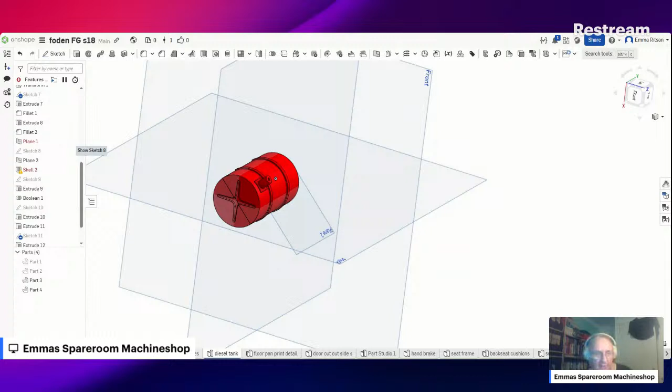Peter, g'day. Paul, g'day. Hello, Mark. Let me know if you can hear me. That's the other thing, don't know if you can. You probably can't yet. You know why?

Microphone. Microphone, is that better? Try that. Am I getting anything there now?

Can you hear me? Yep, we hear everything. Excellent. Me muttering to myself.

Look, this was a bit of a harebrained idea, and as a rule I'm pretty good with questions. That's worse. Plugging this in makes it worse. Let's have a look and see where we're not plugged in properly. Is that better? Let's get this right first. It was fine before. Is that better?

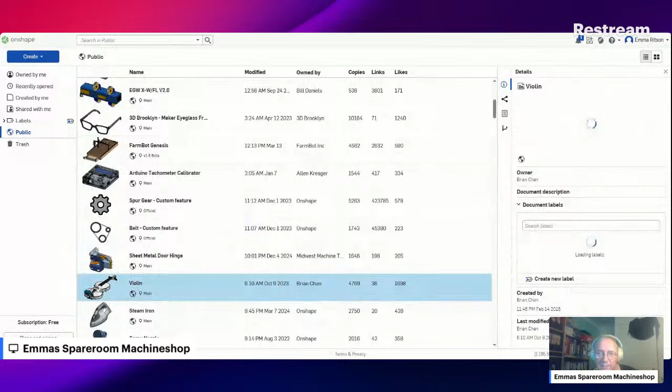That also is probably not the most simple file on the whole server, but anyway, let's give it a minute. I don't know how much lag you're getting. Hopefully it's not too bad. I think I've probably got to slow down a little bit.

Got this bar down the bottom, which means that it's not my actual - even though I'm logged in up here, Hey Russell, even though I'm logged in, I can't actually edit this document.

This looks like a 3D printed violin. I've got all the parts. This looks like a good drawing, actually. He's labelled everything, which, more or less - or we started off labelling everything, which is usually how it works.

Up here we've got a list of features, which are actual parts of the drawing. That's still coming, it's slowly getting there. Now that's a very nice drawing, absolutely. We've got features down here if you want a bit of a look at it. So there's a section view. If we turn on the plane, we can just select a section view.

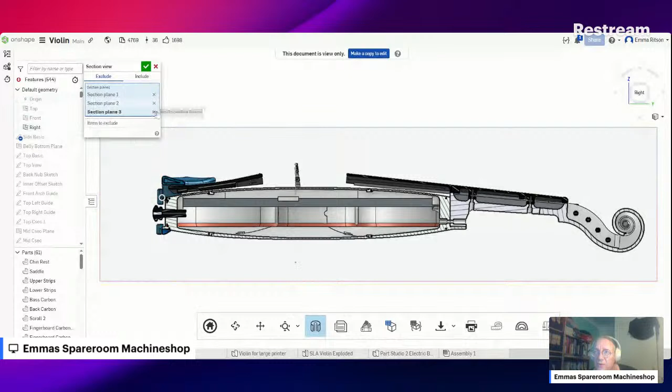So we can either finalize that and have a permanent, well, semi-permanent section, or we can just close it again once we've had a look. And there we are, back to there.

Now down here there's a parts list. If we have a look at that, we can turn these on and off with a little eye as well. So that's how that works. So you turn the chin rest off and on, and the saddle, which I don't know.

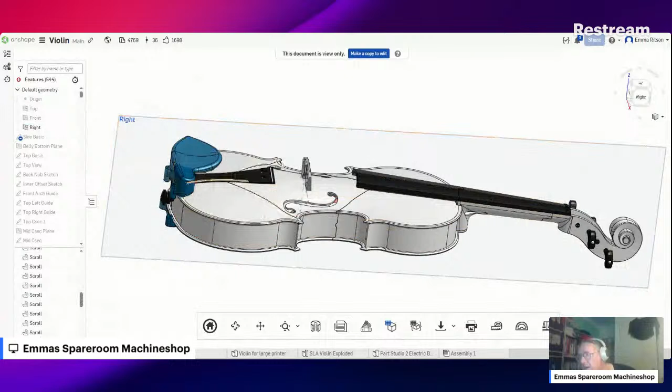But if we come over here and we want to know where something is in the drawing, if we click on it, it will highlight on this drawing exactly which part you've clicked on. So you see that's highlighted it. So we can either turn that off, which turns that off.

We've got all the zoom in and out controls. We've got an appearance panel. We can print this out. We can take a measurement and we can work out what it weighs. We can do some basic analysis, like probably some quite complicated analysis too. We can do curve analysis and interference detection.

So basically, if you've got two bits that look like they're going to bump together somewhere, we can do interference detection on your drawing. And that's something you can do in your drawing as well. Often a section viewer will just pick that up. But I'm not going to make a violin - this is just someone else's drawing, and we've picked this up at random.

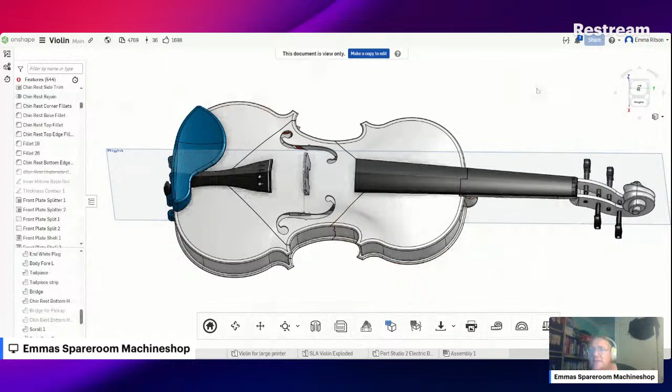If we go back here to Onshape, and we'll start on something. Go back to things that are owned by me. And we've got some options. We want an Onshape document at this point.

And we'll call it something, I don't know. Something that would seem like a really good idea is to make a workshop with some models that we can move around so that we can rearrange our workshop and know if everything fits. That seems like a fairly useful thing that everyone could probably use.

So I thought that's where I'd start, and we call that workshop. That'll automatically open. Now, you'll notice that our planes are already up on the first workspace here.

So you've got a right plane, turn that off and on, same as before. And a front plane, we turn that off and on. And a top plane, and we've got an origin point left. So this is the origin point, which is zero point.

Not a lot of point turning any of them off just yet. But say we want to start with a workshop. We've got Part Studio 1, and this name on this is not particularly helpful. I don't know how to fix that, because down here under Emmas Spareroom Machineshop is a tab that says Part Studio 1. I'm going to rename that to Workroom.

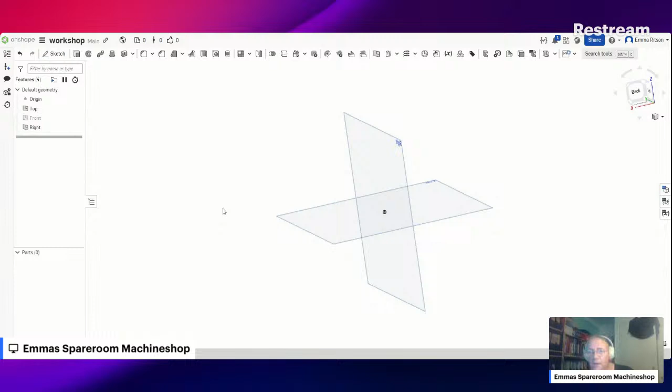And then there's another one called an assembly, which has a different symbol. This one's just got two little columns - that's just a part studio for a single part. This next one, if we hover over it, has two pieces fitted together, and that's an assembly. You can't see that because it's behind my logo, which is a bit of a problem - I'll have to work on that. I'm not sure how to fix it, but we're going to have a look.

So we can pick which side we want to draw on, because this is a bit confusing. If we look at this little square up in the corner, we've got front, top - if we click on top, that'll automatically bring the top plane down nice and flat. We can drag it around with the mouse, or if we use the right button we can just drag it like that. If we click on the corner, that gives us isometric.

So we need a workshop. How big is our workshop? How big is my workshop?

If we sketch it out, if we start at 0, we've got a sketch panel that comes up with some things on it. We're not going to go much into these - they're all fairly useful things in their way, but we don't need to click any of them. Show overdefined is kind of useful, because if something doesn't work, you can see where you've got one too many measurements on it that don't add up. That's helpful.

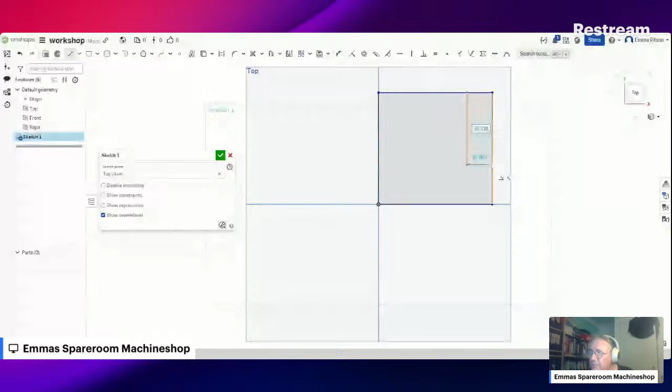Now, if we go to this one and highlight that one and then come back, that changes - and what that's doing is saying it's actually parallel with the other line, which is two different things. So what you've done is change that slightly. If we click on that, it puts a line in, and we click on there, puts a line on. If we press escape - now we haven't put any dimensions on there, but that's roughly what shape my room is.

And there's a little wardrobe in the corner here. What I'm going to do is use the scissors, which is this one here, trim. We can press lowercase m, or just select our icon, and if we select that line there between the 2 points and that line, that automatically removes that.

Now, this square - everyone tell me if I'm going a bit quick - but this square here is grey compared to the background, which is quite a lot lighter. And that means it's been resolved, or the sketch is complete. All the corners match up, and I guess it's filled up with water - there's no leaks anywhere in our sketch. So because that's grey, we know that we can extrude it.

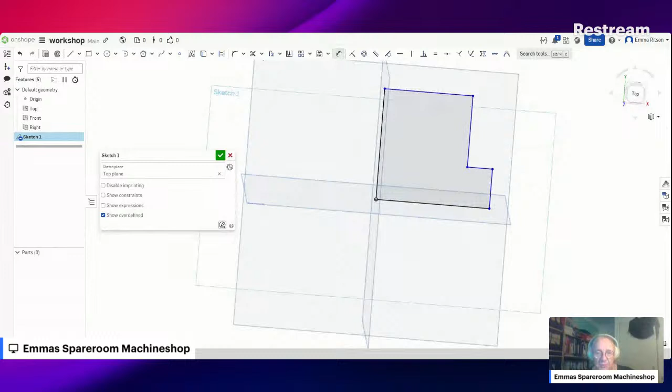And we could go in and put some measurements on that now if you wanted to. If we click this one, which is the measurement, a dimension, you can do exactly the same thing by just pressing D, it selects it. There's shortcuts for everything. If you press L, it selects line. If you select Q, it selects construction line. M selects trim. We'll start with dimension.

Now, that's not much use to us. It says 61 millimeters. Room isn't as square as you think. That's exactly right. But I reckon the room's about 3 meters by 3 meters. So we make a scale model, or we could do it in full size. And there's really nothing stopping us doing it in full size, except that it gets a bit bulky.

So let's do it at 10 to 1. If it's 3 meters, we'll call this 300 millimeters. Now we can change that.

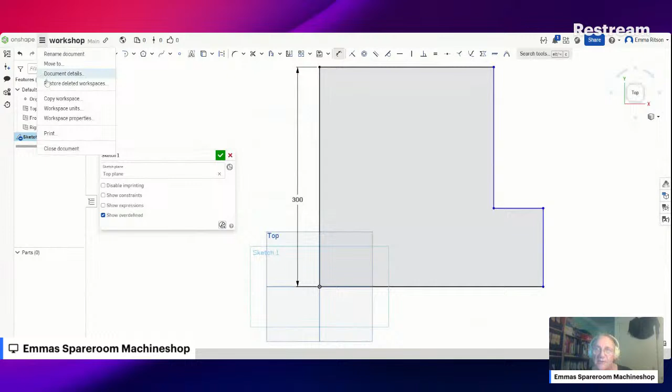If we go up here to this drop down tab up the top here next to where it says workshop, we can change the workspace units. So we can change it to inches, right? And we can change it back. So if you've got a part that really is in inches and you'd like to work on it, you can change it backwards and forwards. You can change it to yards and meters. You can change the amount of decimals and kilograms and all those sort of things. So that's pretty useful. We'll leave it at millimeters.

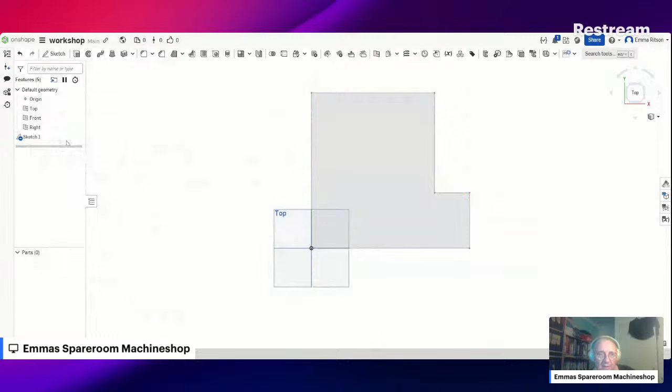Now we've clicked off that sketch when we've done that. It's closed, so we need to go back to the sketch. You notice again that the sketch has got a little eye beside it, so we can turn the sketch on and off if you want to hide it. But if we right click that, there'll be a little turn that says edit, and that gives us our sketch back with our dimensions.

If we do the same thing here, and we've missed out a decimal point there, but we can easily change it. So I reckon that's roughly what size it might be. That's the floor plan.

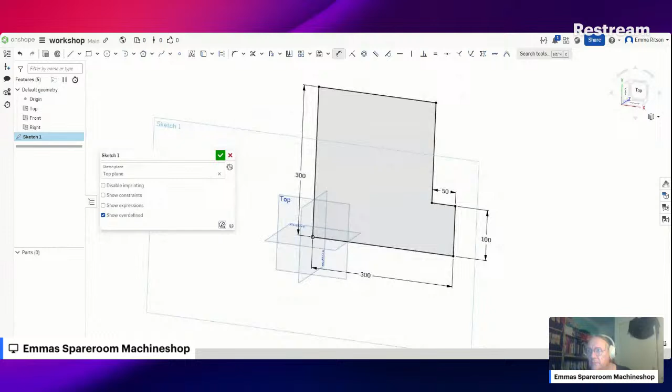For the purpose of this, there's not a lot of point probably extruding it up 8 foot tall or whatever, but we can probably do this just to make it solid. If we click the extrude button, I don't know if anyone saw what I did there. There's this button here. You don't need to close your sketch because it'll automatically select the sketch if you've got your sketch open, and we'll do that.

And we can rename the sketch, right? There's a little pencil there. And that way, when there's 1,000 sketches, you can look back and see exactly what it is, because that changes the name here on the feature menu.

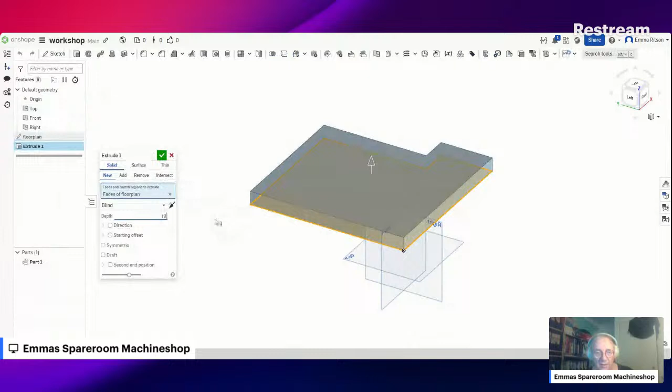Now, to make this into an object instead of just a sketch, if we click the extrude button, that'll extrude it up 25 mil, which is 250. Give it 10 mil, say, for timber and everything.

So there we go. Doorways over here, wardrobes here. We've got all this space. We can change the color. We can change it here where it says part 1. We can change this to the floor, and that way we know exactly what we're looking at. Is everyone following? I don't know if you are or not, but anyway, I'm having fun.

If you right click this, there are all sorts of things you can do, right? You can export it to a printer. You can export it to a laser cutter. You've got resizing, so you can zoom it to fit basically to fit the space. On the right click, you can copy it. You can make a section view. You can hide it, you can isolate it, you can make it transparent, if you want to see something through it to see how it fits.

So what we need is to press the plus button, which is right down here in this corner. There's a plus button. I'm going to have to do something about that logo, I think we're going to delete that next stream. And if we create a new part studio, it pops out almost past the end here. That puts us straight back into part studio number 1 because we already called the other one workroom.

If we rename this one as tool chest.

And let's start here. This is a fairly straightforward thing, the same thing - sketch on top. So it's all basically the same. We'll go corner rectangle, which is R, the shortcut for that.

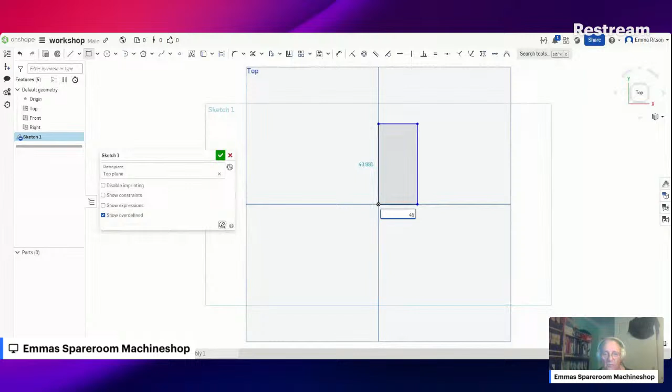I reckon I'll call it 45 mil wide, and I think it's about 600 mil deep, so we'll call it 60 millimeters deep. That doesn't look right - it might be 90.

If we need to change the measurement, if we just press the escape key so none of this is lit up, then we can just double click on the measurement and change it. So that's kind of useful.

I reckon it's 90, that chest. Well, the same deal - we extrude it because I reckon it's 900 high.

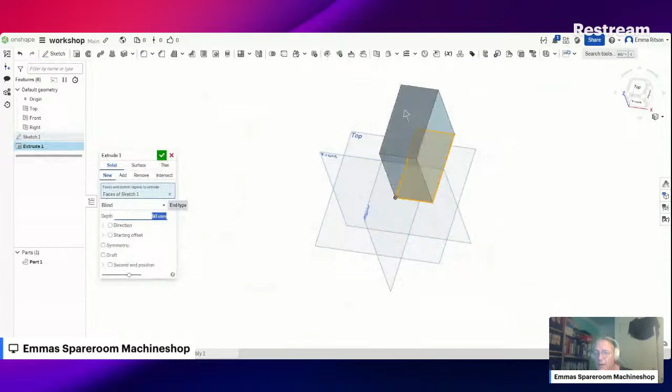Right, there you go. So we've got the two parts. What we need to do is go to this assembly. When we hover over it, see the other ones - when we hover over them, they've just got a part studio icon. This one's got an assembly, 2 parts fitted together. If we go there...

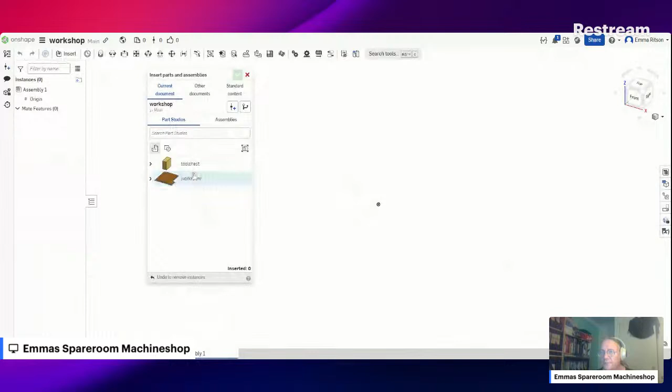And we can insert this. First bit we want to insert is the floor. And this comes up with a list - one says tool chest, one says workroom. If we insert that and click OK, we can stop this moving around because this is right on the origin point, see?

We've scaled it 1 to 10, I'm sorry. You can please yourself whether you do that. If you want to do it in full size and measure it up, it's not a problem, but this is probably a pretty good project to do.

This has got a fancy little feature here. We can right click this where it says here, and we can use this to here, which is fix. And that gives us a little part is fixed, right? So it won't move around - we can sit all the other stuff on top of it and this won't move.

Once we've got that, we can just pull the bits in, really. Put this tool chest in. Now that's kind of exactly where it is in the room. Right? But if we wanted to move it around, we just got to click on it.

And we can grab these and drag it around in a circle. Or we can just press escape. That hasn't put it back where we wanted it - it's all over the place.

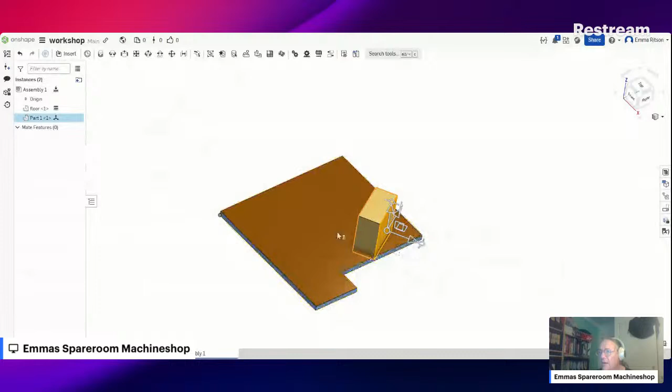Another thing that's interesting is that this pokes through the floor here because this is our origin point. Now we can change this quite easily because we've extruded this up and we've extruded this up from the plane. It's easy to go back to our workroom.

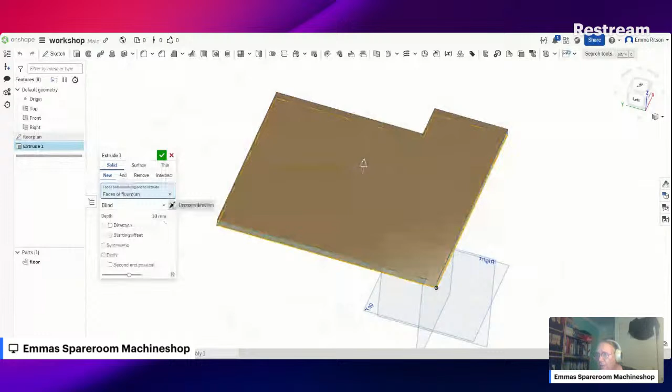Part studio here, and where we've got our extrude up here, if we right click that and click edit, what we can do with this is click this arrow. Right? And that's reversed it, so it's going back down through there.

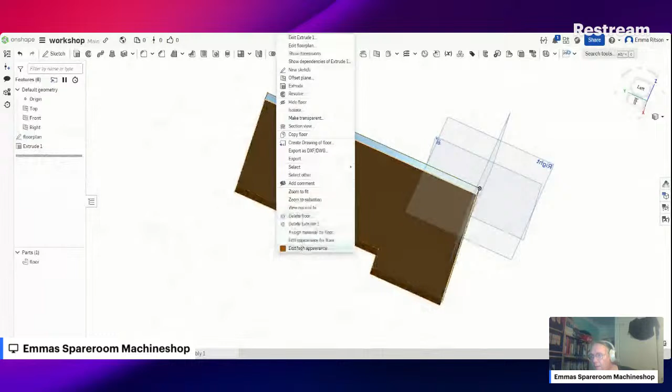Here's me just clicking on random stuff. But anyway, we've got a floor. If we go back to our assembly, that's sitting actually nicely on the floor. It's the wrong color though.

Going to change that a bit. We can work backwards and forwards comfortably. Let's go. What have we done here?

That's a very interesting thing - it's something new that's happened. And that's the other thing, is that this is constantly updated. So anyway, mess around with that.

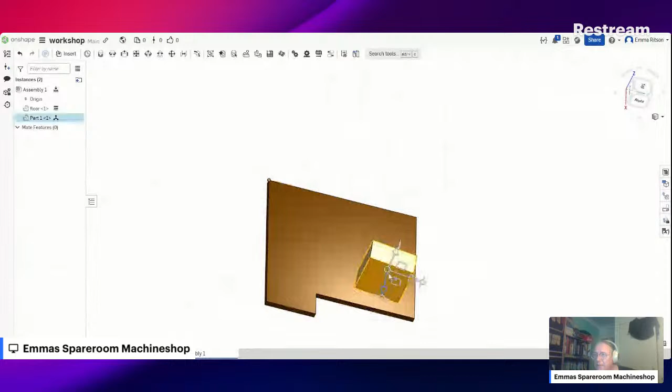So there we go. So if we click this, we can move this out anywhere on this here. What we'd like to do is put this back nice and square in the corner, because now it's all messed up.

And we use a mate as how Onshape works. You've got all these mates here: a fasten mate, a revolute mate, a slider mate, a planar mate, a cylindrical mate, pin slot mate, all those things, ball mate, tangent mates. If we just use a fasten mate...

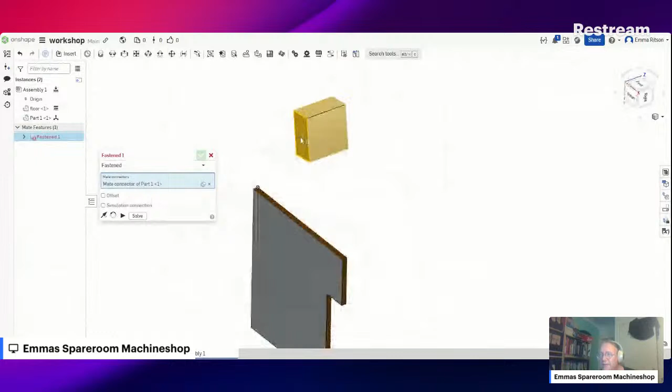And click one side in the middle there, because it's automatically found the center of it. And the center of that brings us all back in line, and we can offset it where we like. So...

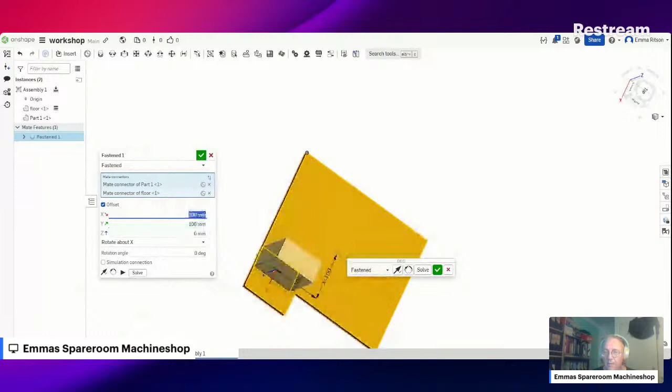It's just some maths in my head. I've just used a negative to move it back the other way. So there we go - we've got the chest in place.

So walk in the door - the lathe goes here. We know roughly how big the lathe is.

Is everyone following along? Is everyone asleep? I don't know where everyone is. There's still 5 people watching and you're crazy.

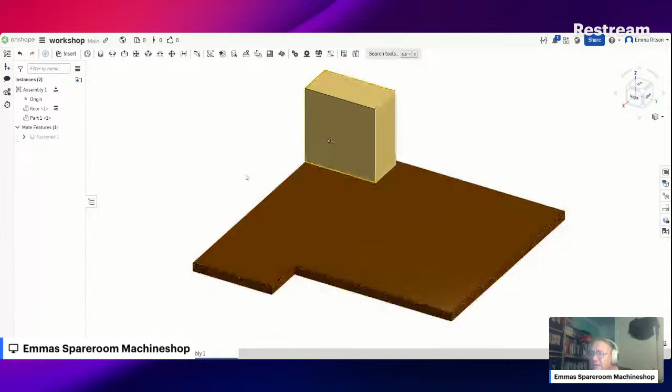But anyway, we want a table here, however rough we want to make it. So, another part studio.

How big's my table? Let's make something a bit more fancy for the lathe table on the top sketch plane. If we go 60 by 90, and click the top, that brings it back in frame here nicely.

Now it's a work table that's 900 tall off the top there. If we go on this so that we can see it, when we extrude it, if we click on the extrude, we've got a few options here. We can just extrude this 900 high.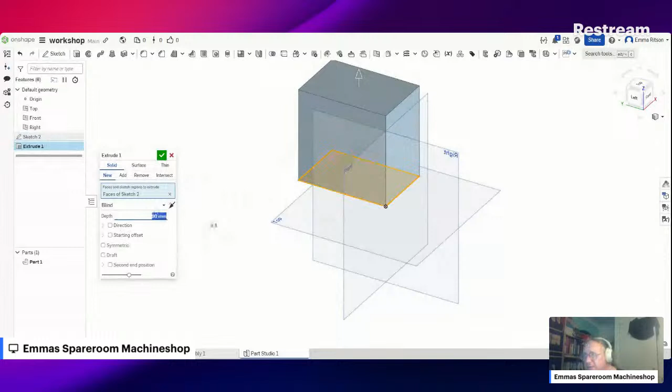Scale feature, and that's all right for a new piece. But if we wanted to make this just a tabletop, and we only wanted to make it, say, 50 millimeters deep, which is about what it is, that sits it on the ground.

However, we've got a thing here called starting offset. And if we type this in as 85, which is 850, that gives us a desktop that's 900 to the top off the ground. So that's one way of dealing with it.

Now, say we want some legs on here. Let's do another sketch, let's get a bit fancy. Put a sketch on the front here, and click line, which is L, and it shows up a little box on the center line there. If we press Q, which gives us a construction line, we can basically come down here.

If we go over this line here, this gives us a yellow dotted line, a yellow inlay when we're parallel. That's telling us - the two little constraints there in the bottom say that it's parallel to the bottom line and the side line.

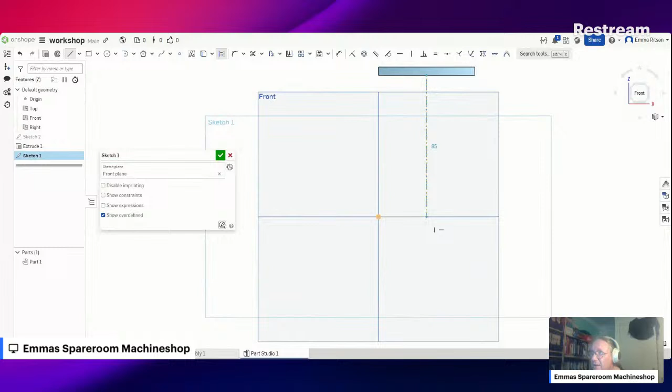If we just press escape, it won't put a measurement in. I don't know what these look like, I'm guessing here. Let's have a bit of a look. They've got fancy legs here, and I'm only sort of guessing, but I think there's something like this.

This little arrow beside these points here, right, that gives us all sorts of options on here. So each of these have got options, right? Just a matter of remembering where they are and what they do.

If we click down on this one here, there's a few options here. We've got a 3-point arc. If we select that, click both ends of the arc, then we can change this a bit here.

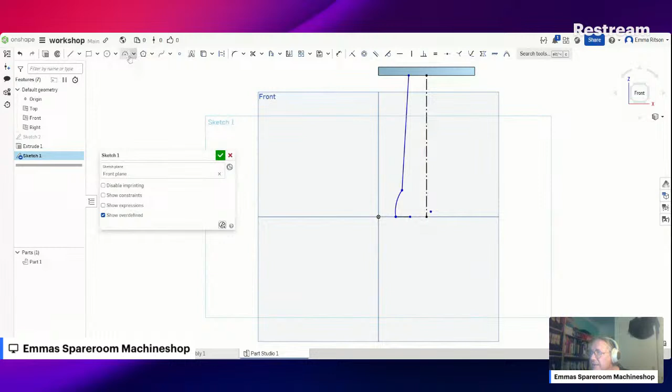The same again, I don't think that this looks anything like this, but we'll give you some sort of an idea what sort of a table leg it looks like. Same there, just click that, then we can use this here to change the radius a bit. You can type one in, or you just press escape.

If we put a line in here, right, it's given us a parallel line with the center line. But if we select, if we move over this, say, it highlights, and move back, it'll give us an orange stripe through the one that's parallel with that line, and it lights up when it does it.

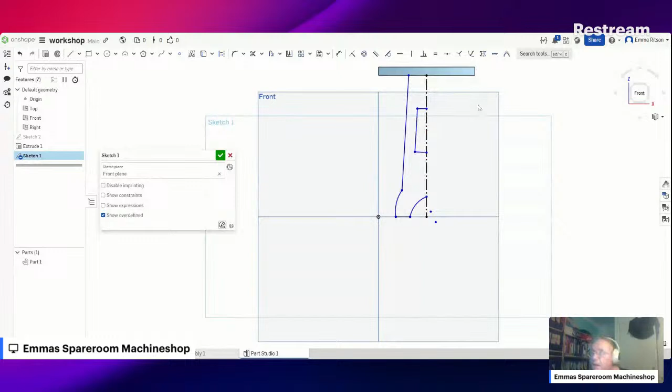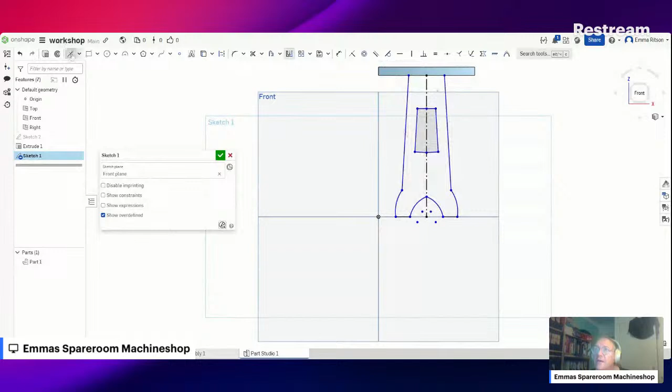We still haven't got a line across the middle, you see, that's still a grid, hasn't actually been filled in. So if we get this one, draw a line from there to there. There we go.

Then we can extrude that, so same thing again really. It says here, faces region. If we select this here, it automatically puts a hole in it and everything. We want to go back the other direction. Let's make it that deep.

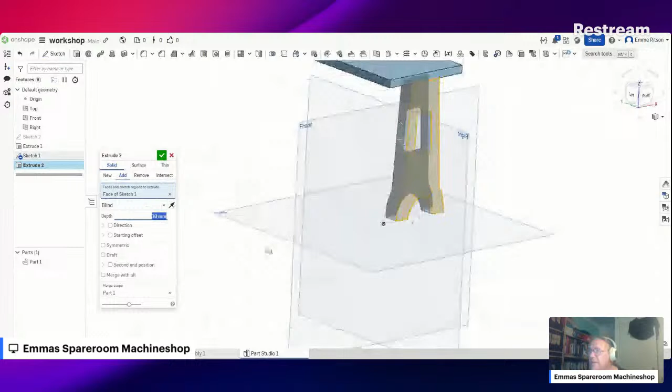Now, what happens is when you finish the extrusion, that automatically hides the sketch for you, so it's out of the way. If you go back over here to the sketch and turn it back on, the sketch appears again. So we can do the same.

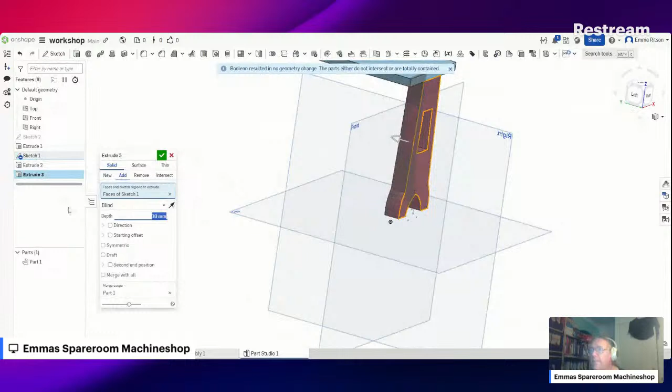Where it says sketch regions to extrude, we can mess around here and try and find the sketch, or we can just click the sketch here in the feature list, and we can make this one the same thickness. But if we go starting offset, the same thing, we could just select this arrow a different way.

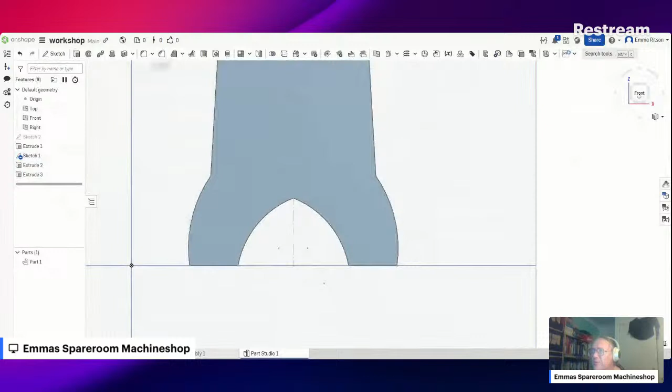Right, we've got something we've drawn up and it's put it off the side of the sketch. If we touch this, it brings it back in, but with the origin point fairly close to the middle. If we move up here to the top and use our scroll wheel, that'll scroll it down. Same as if we move down here and use the scroll wheel, it'll scroll it up out of the way. And same here. So that's how that works.

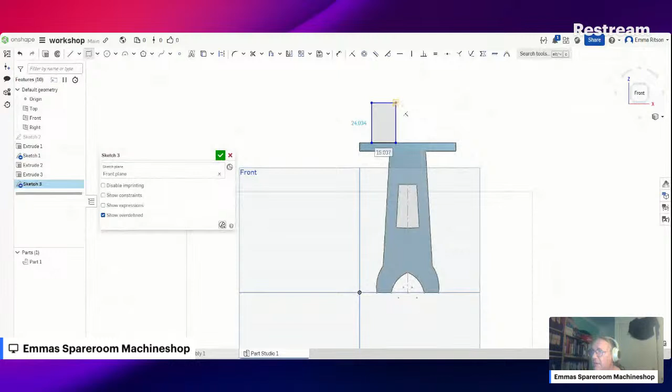If we put the lathe on top of there, something like this, I'm guessing, and extrude it again. Reverse it back over the other way.

That puts a box there. Now, what you've done is when you move this back over to where there's a point touching your existing object, this changes it from new. If we put it back as new, it's a different color, to add, which adds it together.

Now, on this extrude command, we've got lots of things we can do. We can remove it, which, if they intersect, will leave us a gap. Or we can intersect it, which means that if they intersect, it'll only leave the bits where the two pieces touch together. Let's have a look at that.

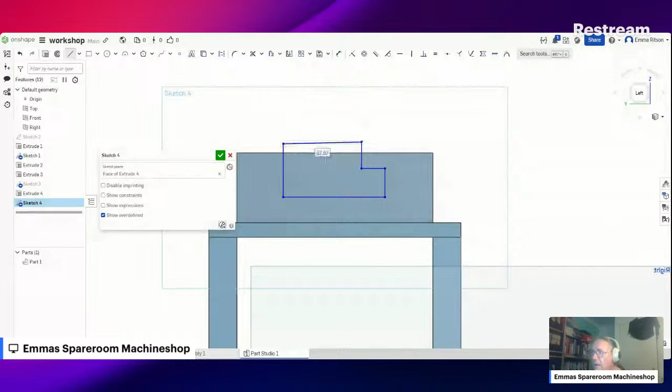Let's draw a rough outline here like this, for a lathe. It doesn't have to be anything particularly sweet, I guess, but we've got that there. And what we'd like to do is cut this piece here out of this. So same thing, if we use the extrude function, if we click remove instead of add, see what happens? That cuts that out of there. So we've got basically the lathe.

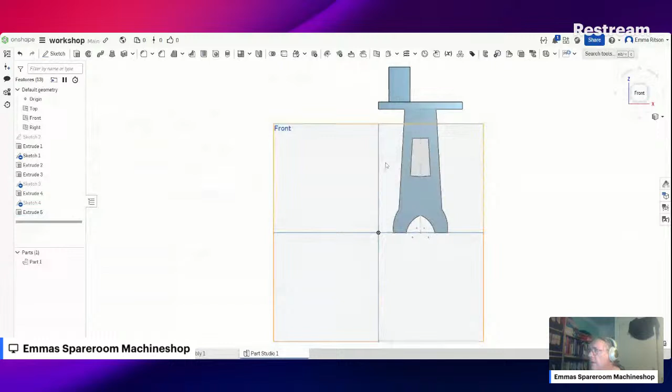Now, let's change the color of this so it's not quite so confusing. We'll rename this here as lathe. We'll call it lorch.

And we click on this and, oh, where are we here? Edit appearance. Let's make it light green.

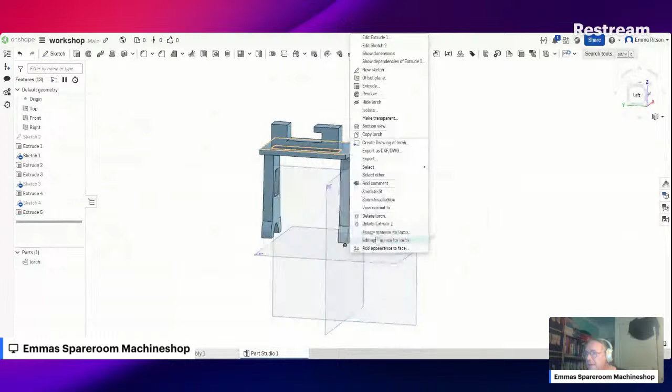There you go. So same thing, if we come back into our assembly, we can insert it just the same. It'll show up here on this list. We click that. It'll insert straight at origin.

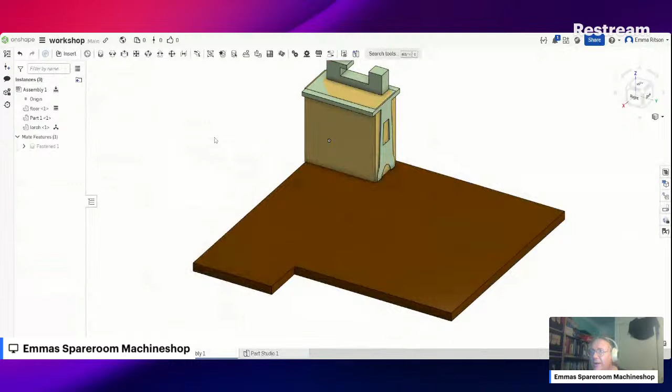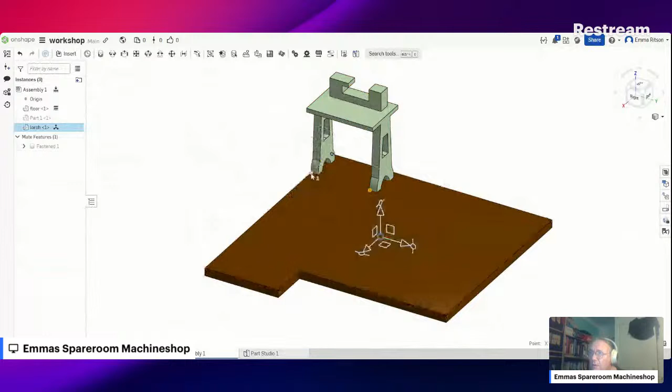If we just put it in there and click this without moving off, or we can drag it around wherever we like. If we put it straight in there at origin, all we've got to do, we'll hide that for a minute. And if we click on this here, that gives us a set of arrows to move this around. If we click on the center circle, we can move this to a different point.

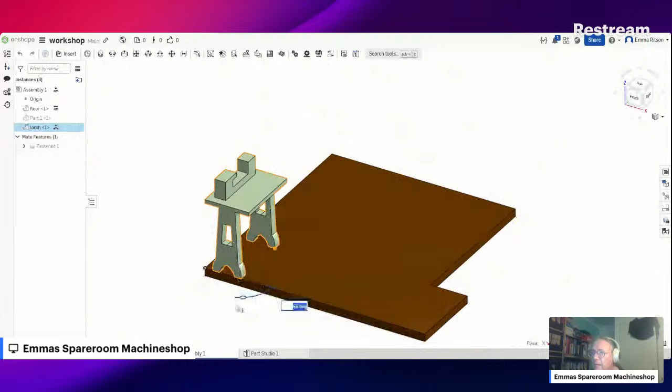Maybe. What we want is that there. And we can pull this round here to 90 degrees. We can move this back here to the right spot. We move it over here to where you want it. And there are ways to set this up.

If we turn this other part back on while we're doing it, we can see whether they actually interfere. That looks about right. So that's the start of the workshop.

Galen, yeah, you can. And with this, yes, there are things you could do for sure. Rendering is fun.

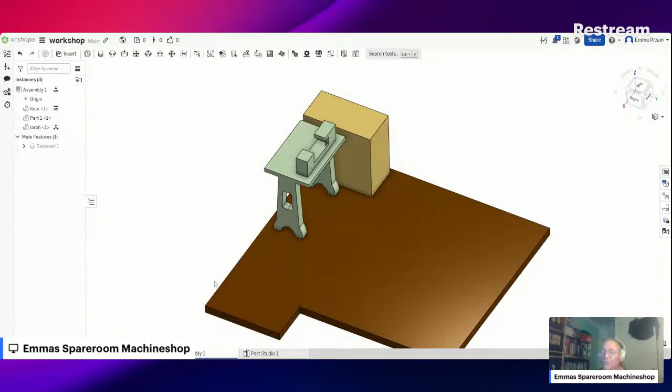As a basic tool, we'll start with this. Anyway, that looks a bit like my workshop for a start. There's another bench in here, and there's another bench over here in the corner. But there we go.

So we've taken up a fair bit of time. I don't know if anyone's learnt anything, but that's sort of how Onshape works. We've got basically part studios where we make parts, and we've got assemblies.

We can also put a sub-assembly in. So if you wanted to make a lathe out of separate parts and put them all together in a sub-assembly, then you could just drag the assembly in and it's all locked together, and you can just move it where you want to move it if you want a bit more realism. But that's sort of how that works.

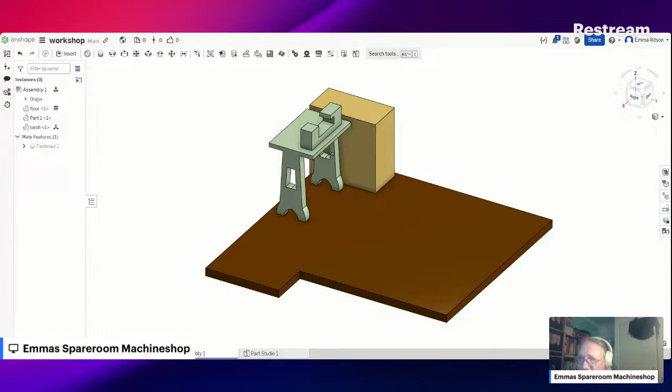There's not a lot of point, I don't think, putting walls in, but if I was going to do that, I'd go back here to the workroom, select that, find the top plane here, and probably turn this off.

So extrude here, we can suppress that so it's missing, and all we've got is a sketch. If we edit that sketch and use this offset function, where are we? This one.

Select that, it gives us a little arrow off the side and a parallel line. So if we change this across here so it's on the outside, and we call this 100 millimeters, 10 millimeters deep, if we select an adjacent line, that automatically pulls this up here so that they line up on the corners, and we do the same here.

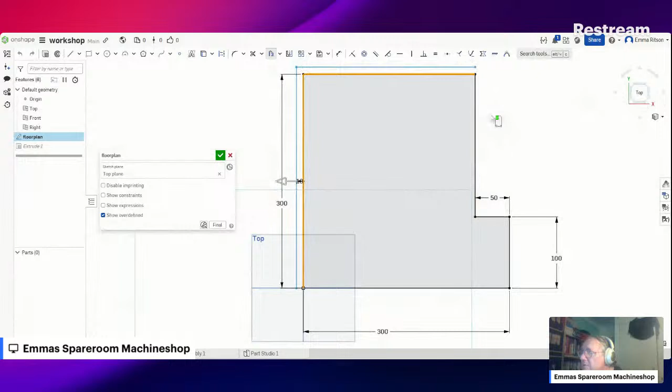And in this inside corner it does the reverse. And we've got that line there. If we click that, what we can do is extrude that space up as high as we like.

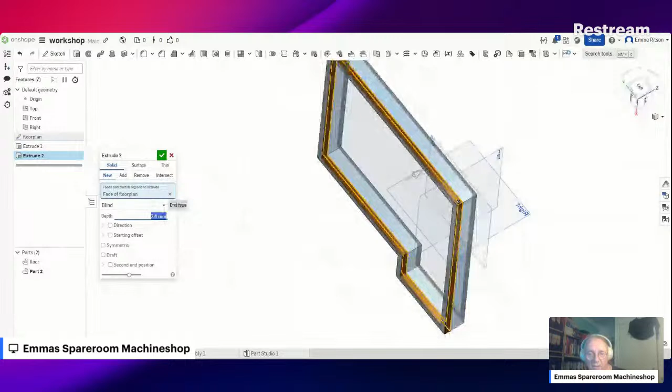Now, this gets a bit complicated because what it's done is this extrude number one, it's actually extruded around the edge rather than the middle. So what you're going to have to do is close that one and select the center again. That fixes your problem.

If we go back to our assembly, we have in this, because this is two separate parts, back to workroom, we've got part 2 here, which we'll rename as the walls.

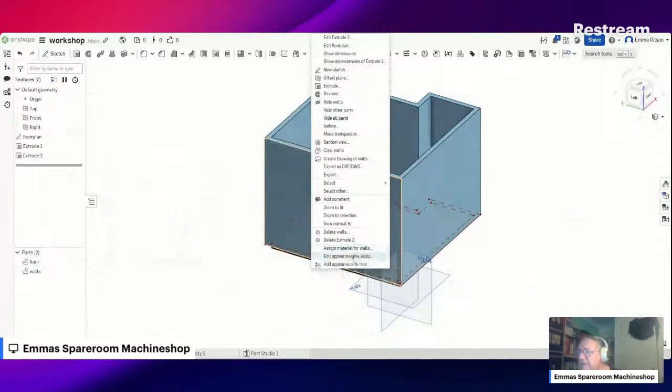I think blue's an awful colour for walls. Let's edit appearance. Let's go for a nice creamy... Ah, that's a bit awful. The grey, what do we got here? That's a bit awful too. We can go here to the mixer and make something up.

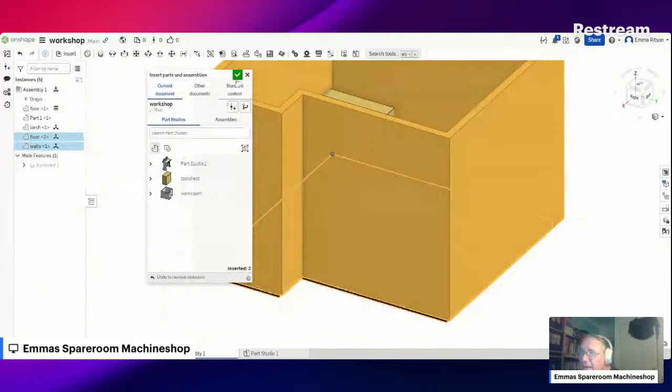But with shadow, it doesn't really show us. What we're going to have to do when we come back to here is the same thing: we're going to insert it. If we don't move off this little screen here, it inserts it back at the origin point, so this will work exactly.

That brings us to all sorts of problems, right? It's a tiny little workroom in it.

Warren was having trouble with doors. We might look at doors basically next time. But rather than sketch them in, what I would do is sketch it directly on the wall here, so put a sketch plane basically on that wall.

How high is the door? We'll call it 90 wide and 200 high. I could extrude that easily—remove it rather than add it. I have to go back the other way.

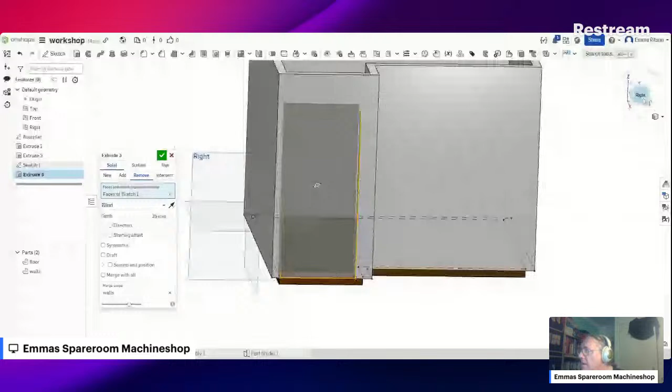That's given us a doorway, see? Simple as that. It saves time when you draw one part and duplicate it. Yes, that's exactly right. If we go to our assembly, that should be automatically updated.

And you can see the lathe and the bench in there through the doorway. There's a window over here in this side. We'll do the same and then we might call it a day and answer some questions.

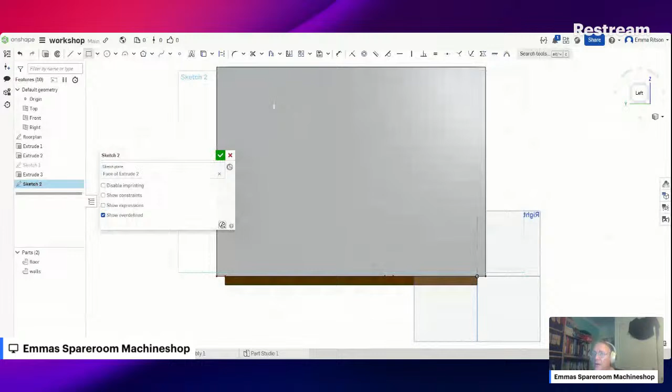I'm pretty quick with this, and I'm not actually sort of... I know that this is about 1 metre up.

Now, because this is unconstrained, which would mean there's no dimensions on it, we can just grab this line—I'm a liar, we're going to have to put a dimension on that. There's a constraint snuck in somewhere.

We can extrude that. Wrong button, not doing well here. There we go.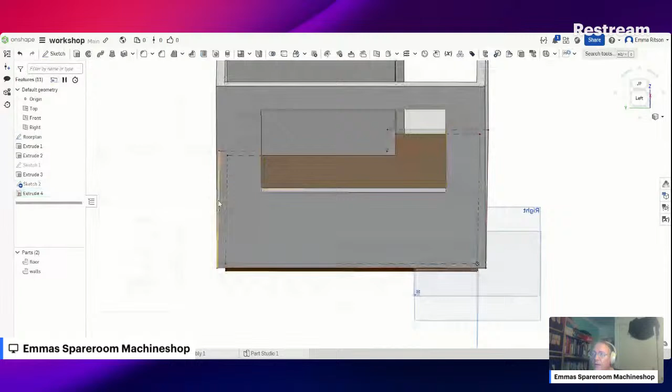That opens up the room a bit. There we go. So that's a fairly useful little model to make of your workspace, because if you want to

move things around, all you got to do is... we should, I think, if we have another go at this next week, make these drag and drop so we can just move them around. There's an easy way to do that, but right now we've got to actually change the dimensions on them, but it might be very useful.

So I wanted to try and put some of these sort of ideas, or the experience of messing around in a CAD program, to practical use, and have something that's actually of some use to people. So hopefully that is.

I'm sure you've all got thousands of questions, and you're going to go and try and do this, and you're going to think, yeah, I can't handle this, or this isn't doing what I want it to do, or how do I make this work?

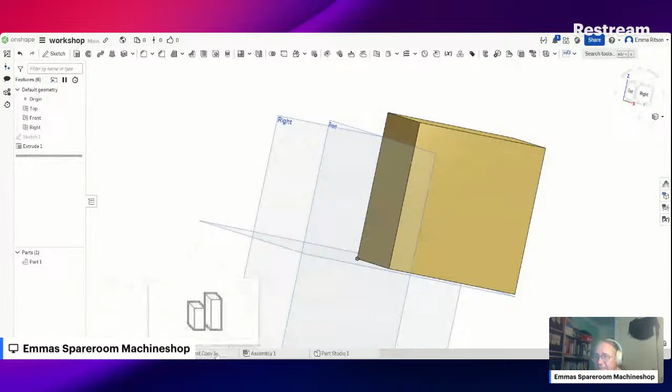So what this has done is given us a tool chest copy. I'll copy one. If we rename that for workbench, and change the sketch to something like that, we've got basically an outline of a workbench, just the same.

I'm going to rename this to workbench so we don't get confused. It's a really good habit to have, and probably just to make it a little bit less difficult to determine between them, we're going to change the appearance too. So we'll change this to blue, purple or something.

And then if we go back into our assembly, we can insert the workbench. We've got another one there to show up. That goes over there somewhere, roughly. Don't think it goes just there because it's through the floor. Just Control Z that and start again if you muck it up.

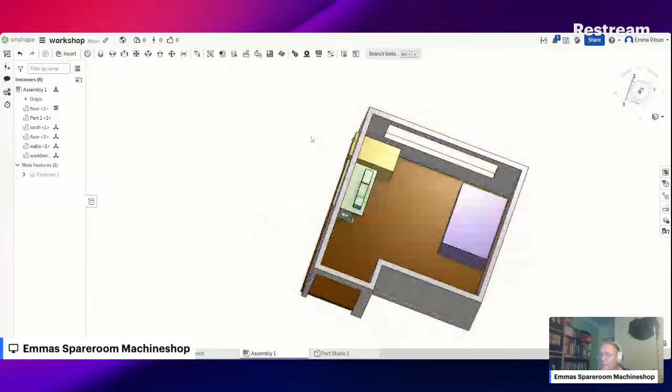All you've got to do is duplicate the tool chest and... see, something's moved there. This is sticking out the side. At some point we've moved this, so we're going to have to align that. We'll look at all that next time.

Anyway, there must be 1,000 questions, but everyone seems like they're just sitting there. I'm impressed that we've got 6 people, because it's something that's interesting to me, and I've just basically messed with it for long enough that I've picked up all the shortcuts and tricks and things, and I've watched a lot of tutorials. Go and watch some tutorials, they don't always show the correct procedure to do things.

A Feng Shui button, that's what it needs. I'm sure there's a feature script that you can add in. In fact, there's probably a market for one if you wanted to sit down and design one, if you're looking for a project.

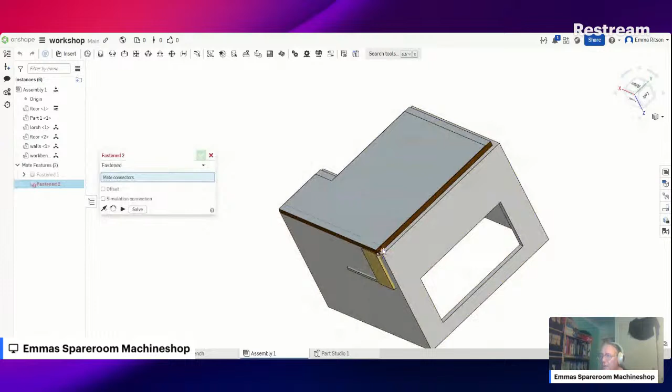Let's line this up. See, we can easily turn this over. Fasten mate, that's going to drive me crazy. Mate connectors. Zoom that in, use that one. And that one, that'll line them up, but it's not quite right.

So we can offset that. Offset that 10. It's actually -10. Let's line that up. And this one must be -10 too, I think. There you go.

So they're fastened in place, you can't move that now. This is fastened to the fixed piece. So anyway, not a complicated thing to do. You can put as much detail into something like that as you like.

And if all the pieces are actually on different tabs or workspaces, then you're not using up a lot of computer space in the server, and you're not going to worry too much about your bandwidth messing up. When you start down the track of making something complicated with no particular planning, then you're going to have problems.

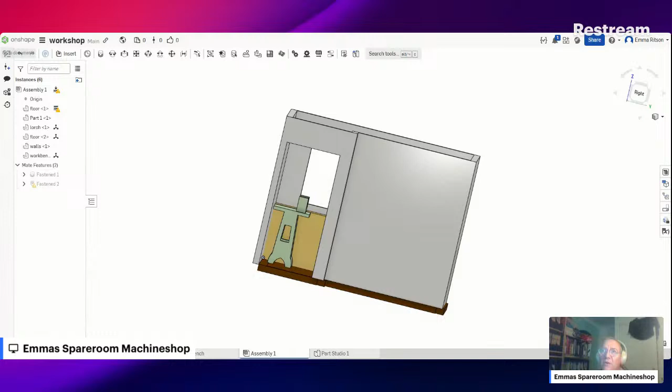If you're building an entire railway locomotive, for example, we'll go out here and we'll have a look at what I've been working on. You've probably all seen this. Might take a minute, because it is a fairly complicated drawing with, as you can see, 1,000 tabs here. That's actually a fuel tank.

But if we go to this one, which is my general arrangement, everything just ended up on here because I started parts to map out and view getting them right, and everything just got joined in, and now it's all over the place. So there wasn't a lot of planning in this one. It's a bit of a problem.

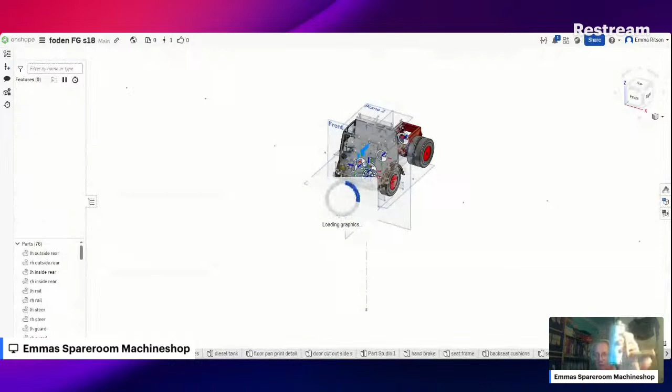Revolve function, a center line down the middle, and then revolve it round in a circle. They might work on that next time.

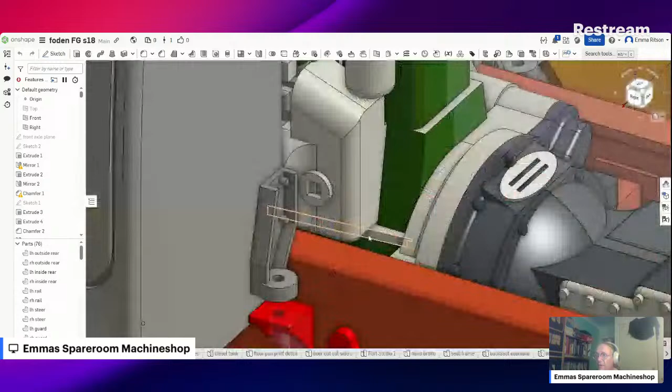This needs a bit of a clean, I think. Still got all the windows and things in place. But give you some idea, anyway, this is a bit complicated, Nigel.

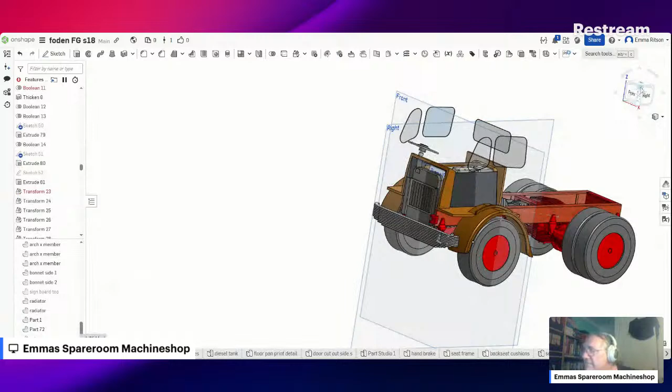It started off with just... what happened with this is that there was a build-off or a competition on Facebook with a group of people that I sort of interact with and follow a little bit. And many years ago, I used to make plastic model trucks. Don't know why I stopped, except that it got a bit boring and a bit expensive, and there's only so many Macks and Kenworths that you can have because they're really boring trucks. So I wanted to participate, and I started with this, and there were some things that I wanted to sort of model up to see exactly how they were, with a view to 3D printing them maybe, or just seeing how bits fitted together.

And in the end, I wasn't going to show you this, but I've got basically a chassis with red gloss paint on it tonight. Look at that. Oops, dropped that. It's broken that. And all the bits.

So it looks like it might be a reality. I've procrastinated some things I shouldn't have. I should have got things done. But working forward, we've sort of made a big enough hole in this that we can go ahead and finish it in the time frame and do okay and get some of the other things done as well.